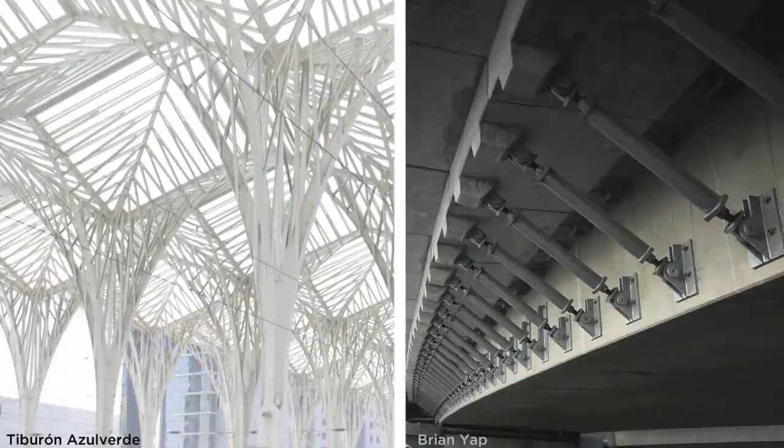The world is full of repetition. Look at almost any object and you're likely to see repeated parts and shapes. In this video, I'll discuss how to use Google SketchUp to help you design symmetrical and repetitive objects with ease.

First off, everything I show in this process can be achieved with any other 3D package, but I prefer SketchUp because of the way it allows me to fluidly experiment. I'm not getting into the specifics of the software, like what button to press. It's more an opportunity to show the software doing what it does best in a production environment.

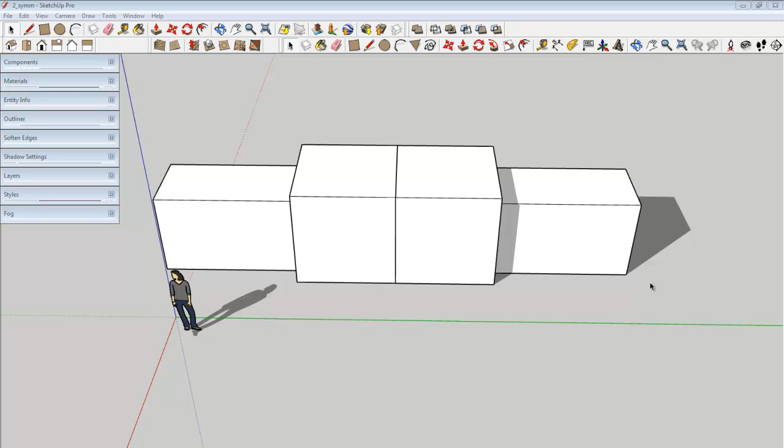In this first example, I'm going to design a simple symmetrical object. Like people, cars, and bugs, this is bilateral symmetry, meaning it's got two equal halves and a center line. In SketchUp language, each of these halves is called a component, and if I modify one component, the other receives the changes. So watch as I shorten this cube, and you can see the other one does the same in symmetry.

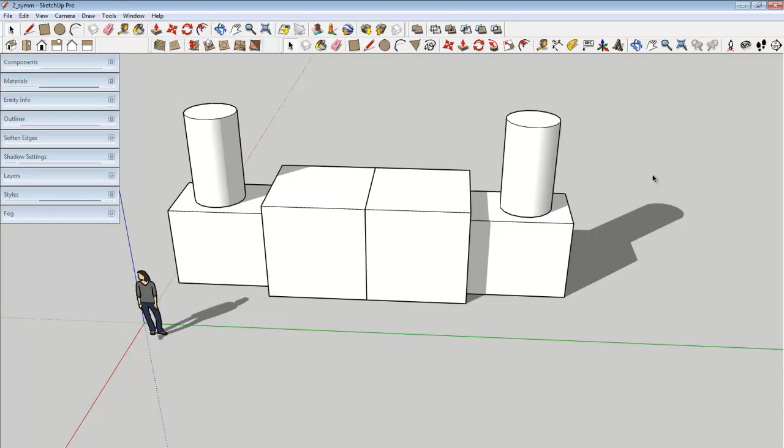I can add parts as well. Say I wanted to add a cylinder sitting on top of one, the other would receive the change. This kind of working is incredible. It's intuitive and accurate at the same time. This would be hard to do with a pencil.

Not impressed yet? To prove my point, this next example is going to be a perspective nightmare. I've decided to design an object that has rotational symmetry, not bilateral, in 7 equal modules, like 7 slices of a pie. So let's take a look.

If you've ever drawn a spiral staircase in perspective, you know it's possible to do, but if you ever wanted to modify it, it's a major, major pain. Well, an object like this is pretty similar. To divide something up into 7 equal parts is crazy math.

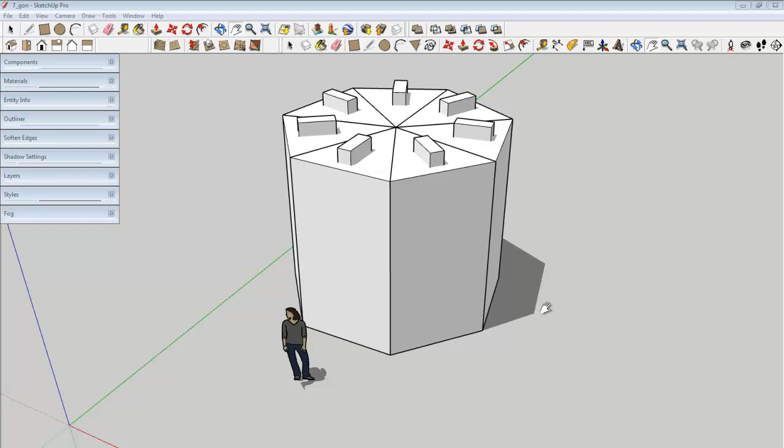So if I wanted to then change the shape afterwards, or maybe the art director said, what if it had some cutouts on each of the sides? That would be incredibly difficult with a pencil. But if you watch what I do here, it's no harder working with an object of this complexity than it is to work with a simple two-sided object.

So here I'll make a cutout of one of the faces, and then all the faces receive it. This is really nice.

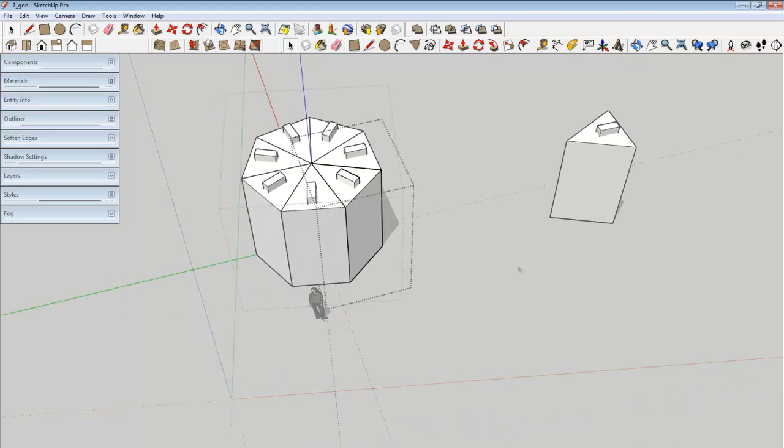Let's take a look at this object over on the side of my scene. Looks like a lone pie slice. Well, this is actually just another duplicate of those same components, and I can use it as my control module. So anything I do to this one, the others will receive as well.

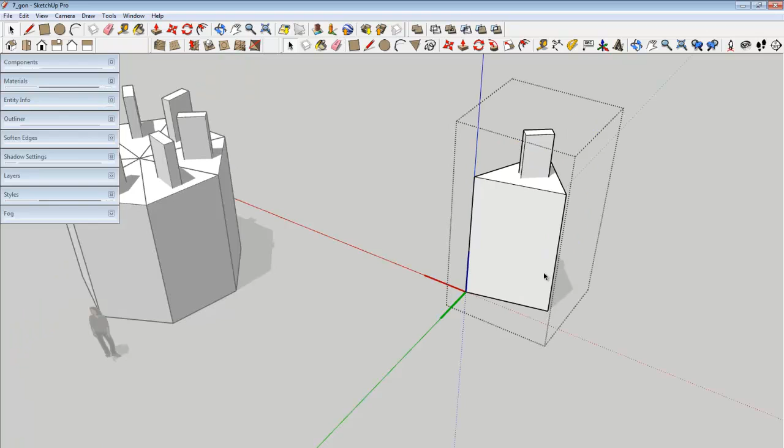So you can see that the workflow is really intuitive and has very little to do with the way you would actually draw. But from a design standpoint, you design, think, and sketch in the exact same way. You just get the results much faster.

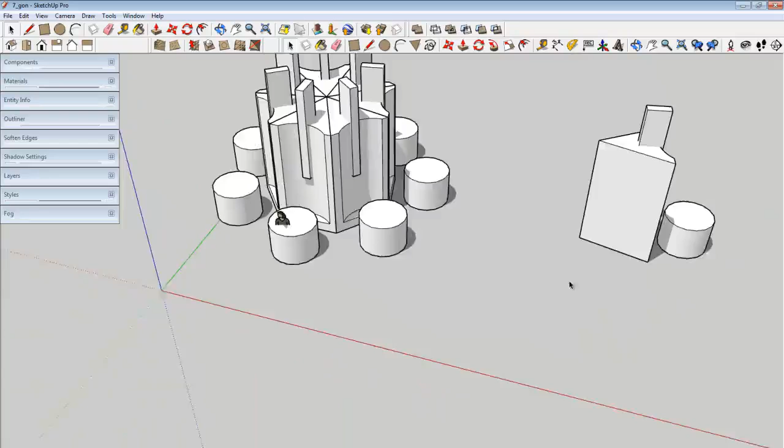So given a ruler and a pen, I have no idea how to approach a challenge like this. Again, I might be able to draw it, but then changing it would be impossible. SketchUp doesn't really shine in pure drafting quality. It doesn't make beautiful lines.

But what it does really well is the ability to fluidly design and just sketch in perspective. Once you've come up with the shape you want, then you might do a proper drawing with some different media, or a finished drawing of some sort. But as a shape invention tool, it's really hard to compete with 3D software.